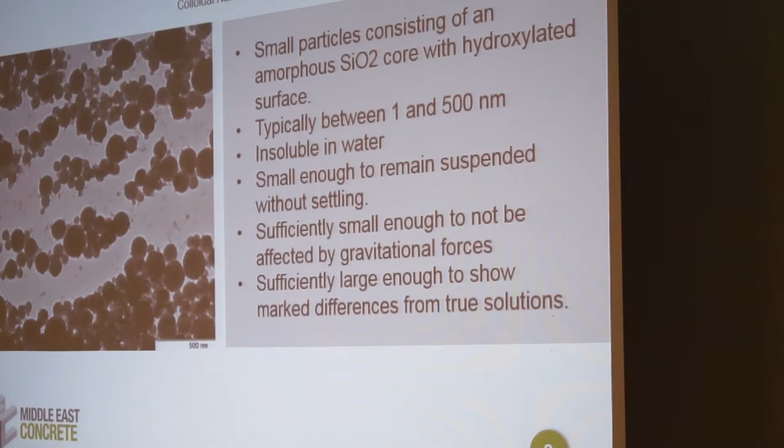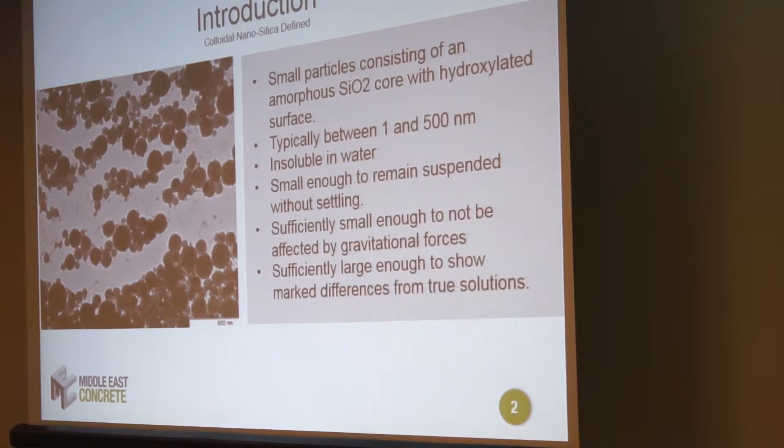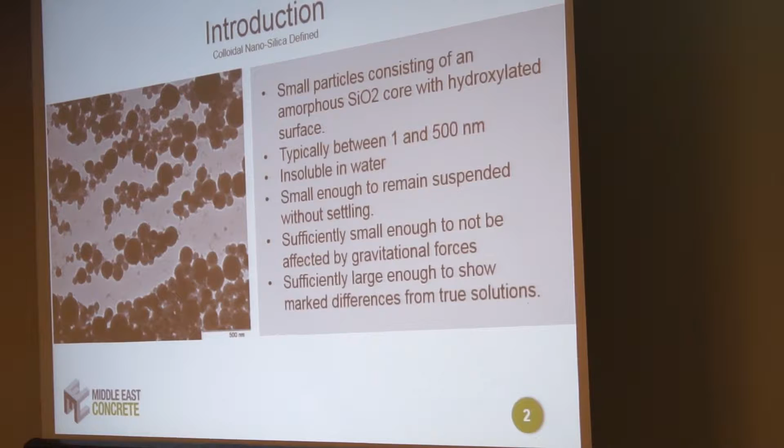Just as an introduction, colloidal nanosilica is very, very small particles of silicon dioxide. It's an amorphous silicon dioxide, typically somewhere between 1 and 500 nanometers. They're small enough that they can remain suspended in water, and the forces of gravity don't cause them to fall out of that suspension. So they're very, very small. But it's not a solution, not like a silicate solution, where the silicon dioxide is coupled with some metal ion. The colloidal silica particles can actually be seen under heavy magnification, and you can see that they're spherical in nature, but sufficiently large enough to show differences from true solutions.

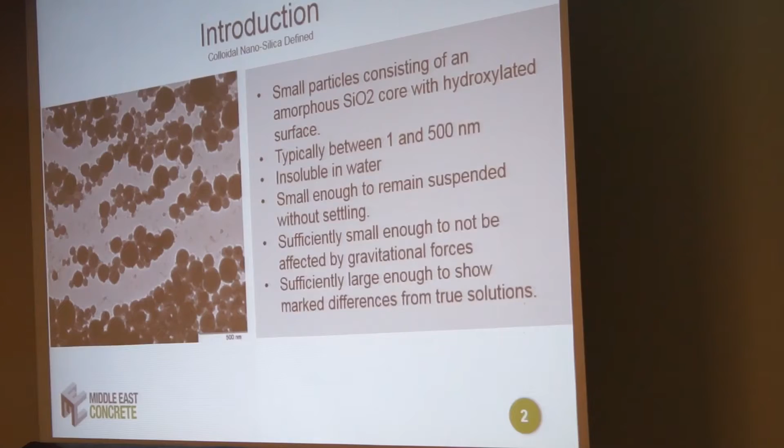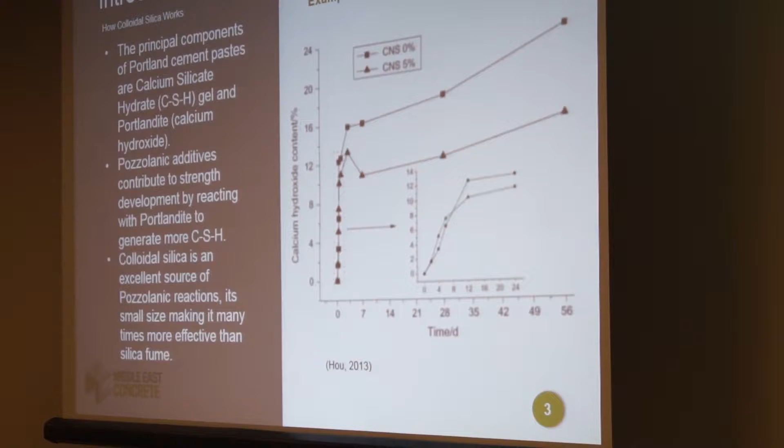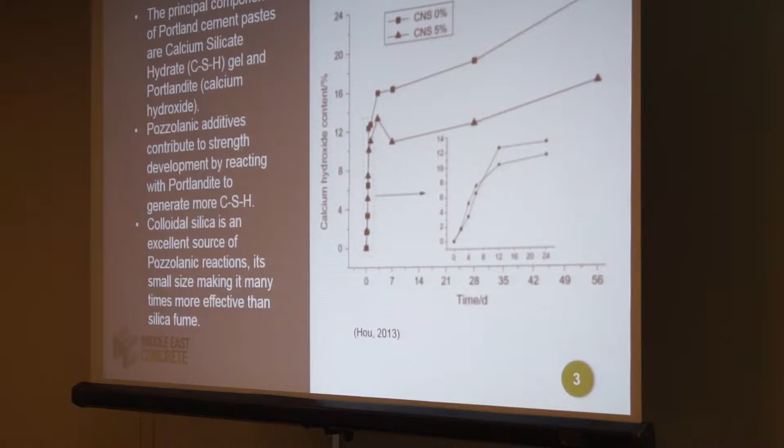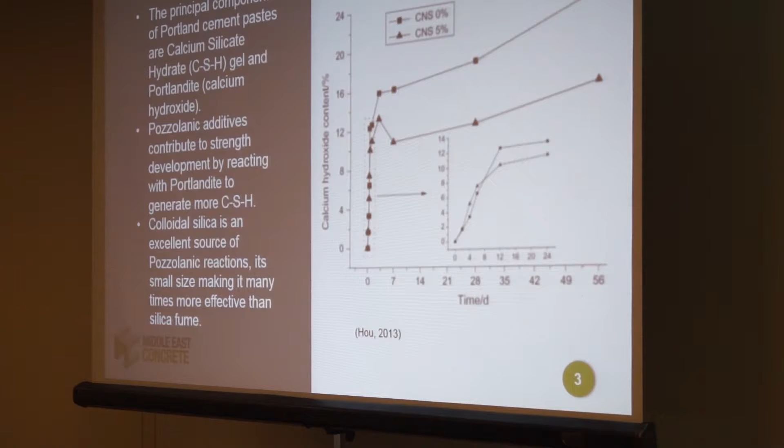The way they work in general, as a brief overview, is that they react in a way that is very similar to the traditional pozzolanic reaction, which many of you, if you've studied concrete, know what that is. It's where a silicon-bearing material reacts with existing calcium hydroxide to form more calcium silicate hydrate. Calcium silicate hydrate is one of the 2 main reaction products of the cement and water hydration reaction. So this secondary formation of calcium silicate hydrate can happen later. These pozzolanic additives make up things you've probably heard of, like fly ash, silica fume, ground granulated blast furnace slag, or GGBFS slag cements. Those things all have pozzolanic reactions very similar to what we're going to be talking about today, the colloidal nanosilica.

We see from the literature that colloidal silica is an excellent source of pozzolanic reactions, mainly because it doesn't differ chemically from the other pozzolans I mentioned, but its very small particle size makes it highly reactive, able to undergo serious reactions due to that small particle size, which means much more surface area.

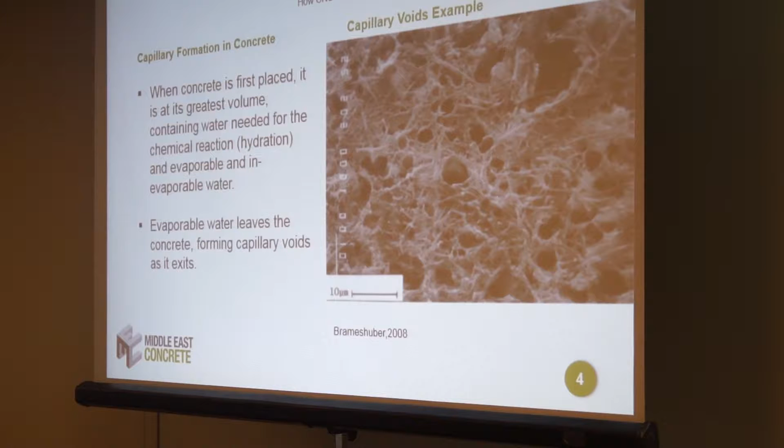We know that when concrete is first placed, it's at its greatest volume most of the time. So you have water of convenience above the water needed for the hydration reaction. That water leaves, the evaporable water leaves the concrete, forming capillary voids - like little rivers that form as the water evaporates from the concrete.

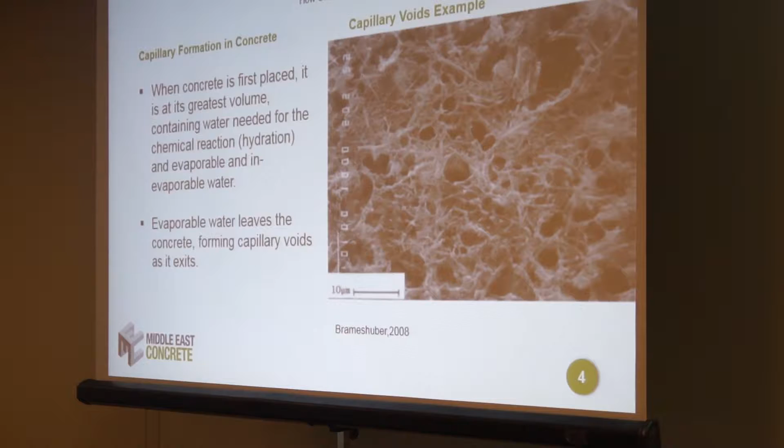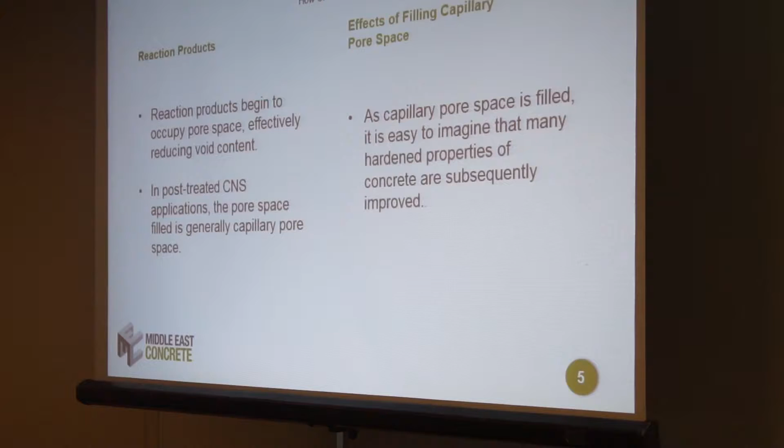The problem is that those capillary voids are not only the way water leaves, but they're also the way water and other contaminants can enter the concrete. We know that permeability to water has been linked to durability of concrete. It's the primary indicator of how long concrete is going to last, especially in reinforced concrete.

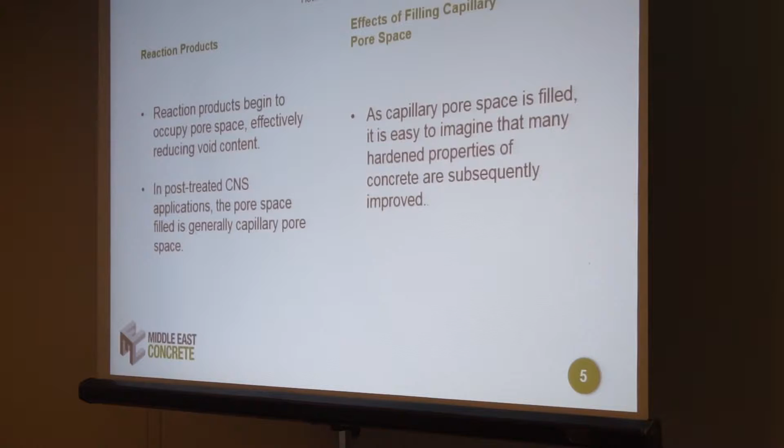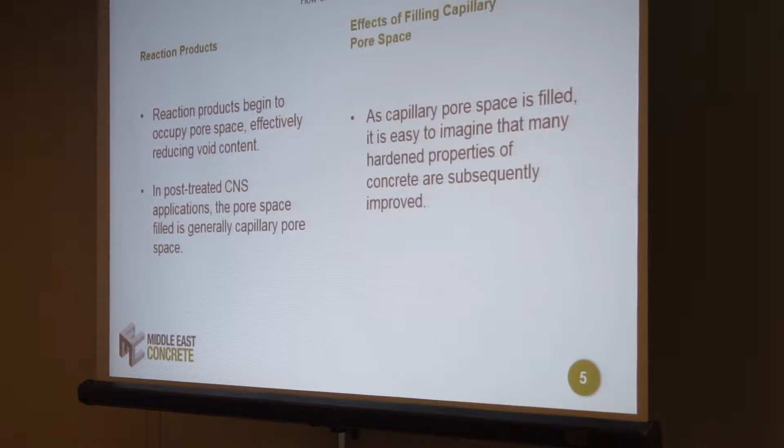When colloidal nanosilica is applied - I'm specifically speaking today about post-applied colloidal nanosilica. There's been a lot of research on integral colloidal nanosilica mixed with the concrete. What I'm talking about today is post-applied, meaning the concrete is mixed, sets, gains initial set, and then the colloidal nanosilica is added as a spray.

It can be added at various times in the life cycle - from just as initial set occurs, or many months or years later. Similar positive effects have been noticed from the colloidal nanosilica addition.

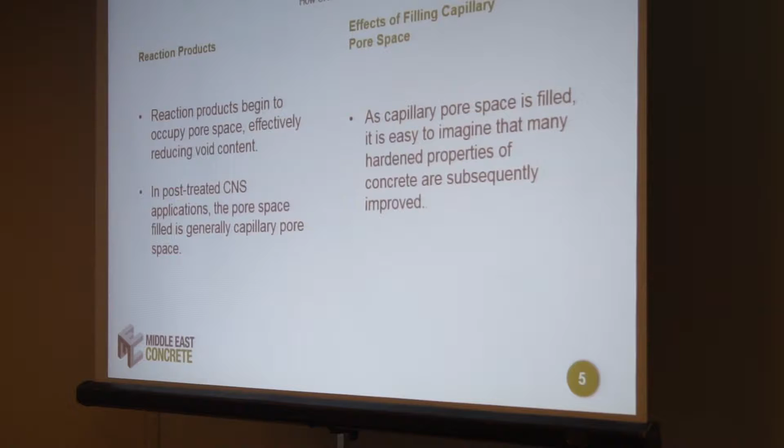I'm going to start referring to colloidal nanosilica as CNS, because it's a lot to say. In post-treated CNS applications, the pore space filled is generally the capillary pore space that comes when the water of convenience leaves the system. As that capillary void space is filled, it's easy to imagine that many of the hardened properties of concrete can be improved.

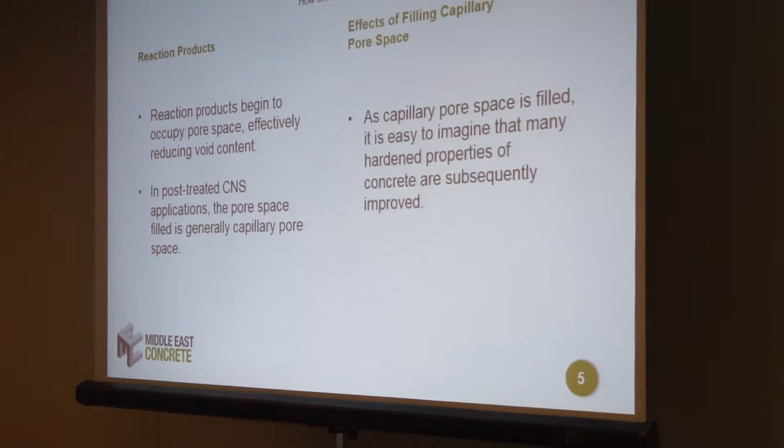The primary filling mechanism, from the literature review, is the pozzolanic reaction we were talking about - taking calcium hydroxide and reacting it to form more calcium silicate hydrate, which begins to fill that capillary void space. If you reduce the amount of void space in the concrete, there are a lot of hardened properties that are likely to improve.

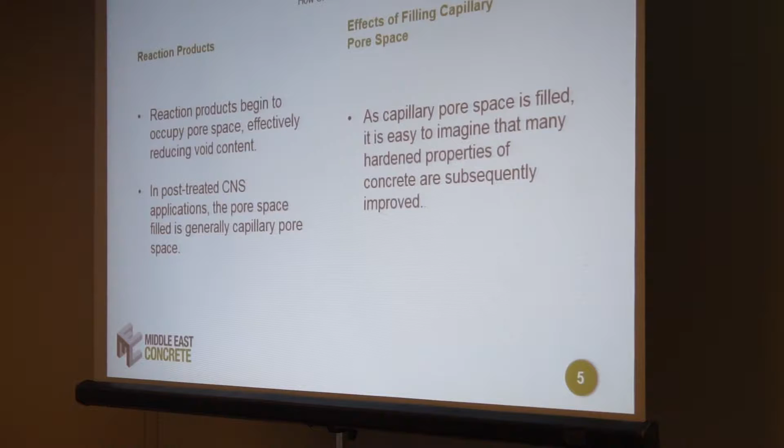We're going to take a look at those - the effects on compressive strength, drying shrinkage, and permeability. We're going to look at corrosion modeling based on reduced permeability, and a case study we did at the Port of Marseille, France, on a boat dock. The port wanted to try colloidal silica because they had tried many other things to increase the durability of their concrete, and they approached us to assist in this case study.

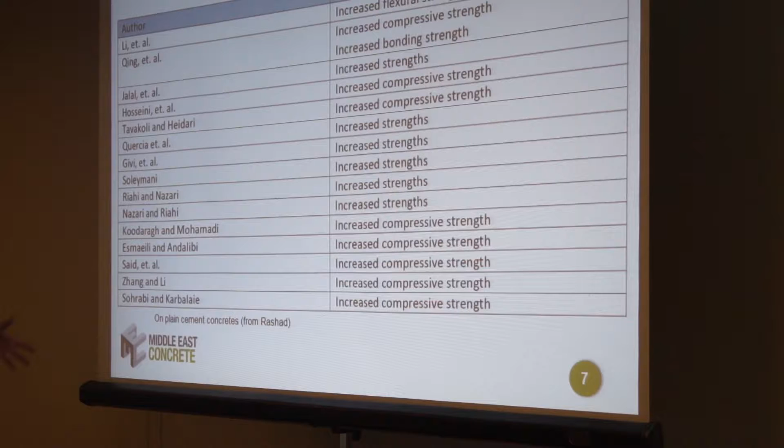I want to share some compressive strength effects - these are from previous researchers in the field, not me. Not all of these are post-applied; some are colloidal silica used as an integral admixture into the concrete, but the effects are the same. You can see a great lot of researchers have all demonstrated increased compressive strength.

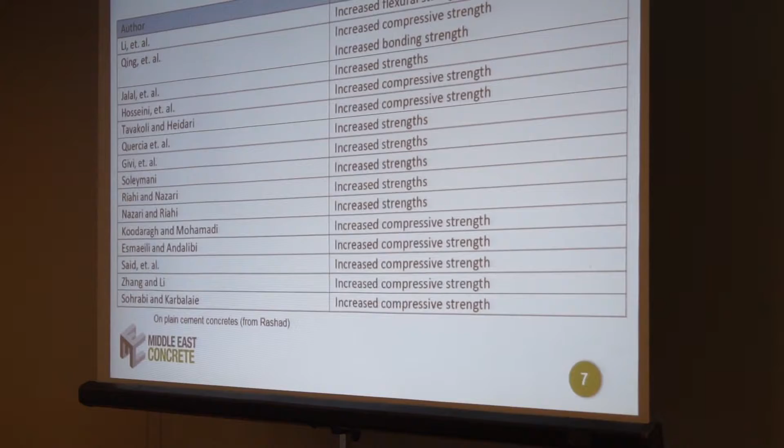There's some thrown in there - increased flexural strength, increased bonding strength, etc. This continues with researchers showing those strength improvements from using colloidal nanosilica.

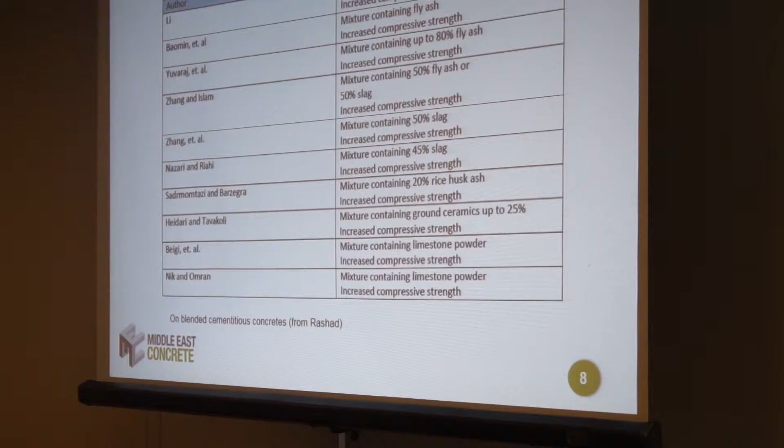So one key thing to understand about spray applied colloidal silica is that the effectiveness, or the amount of compressive strength gain you might get, is related to how permeable the concrete is to begin with. We know that concrete varies in permeability, and the primary driver of that is water to cement ratio, but other things can also affect it, such as aggregate gradation or particle size, aggregate shape. There are many factors—even the mix of cementitious materials such as cement and fly ash, and how those particles fit and pack together—that can affect permeability. But typically water to cement ratio is looked at as one of the primary indicators of where your permeability is going to be.

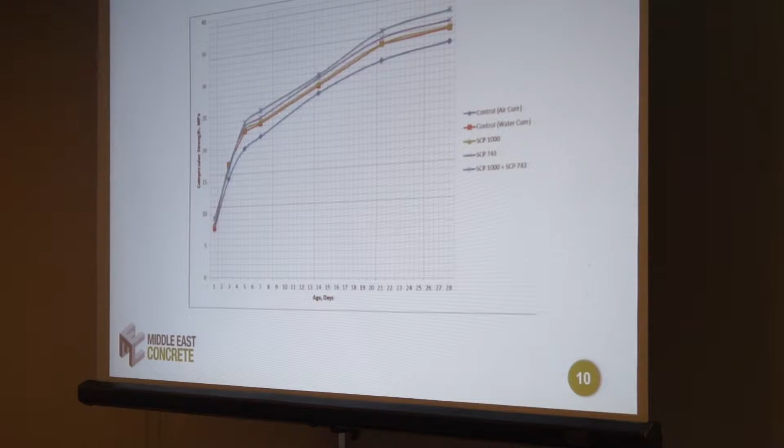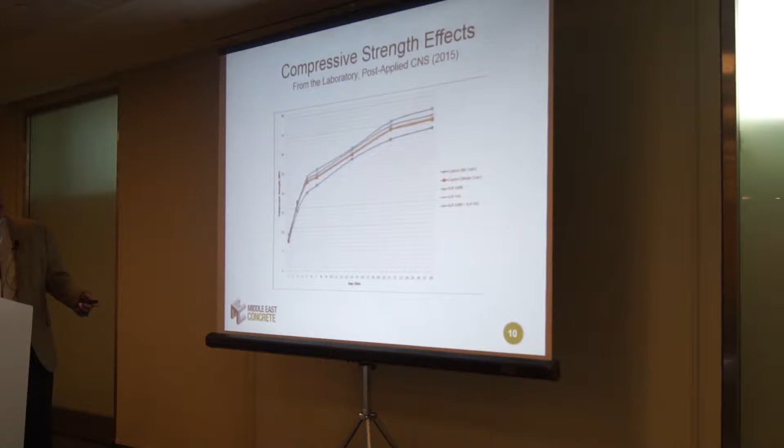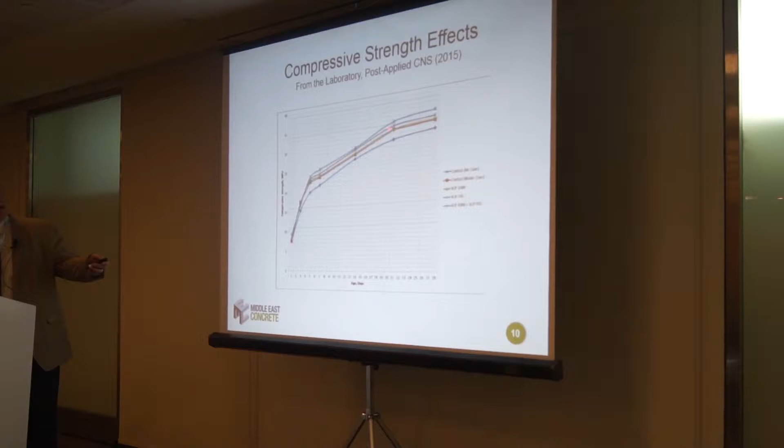Here we see, from 2015, the compressive strength effects from the laboratory, post-applied CNS. It's kind of hard to read, but you can see down here this is a curing study where we broke several samples at various ages. You can see we have the control here, and this is various applications of colloidal nanosilica.

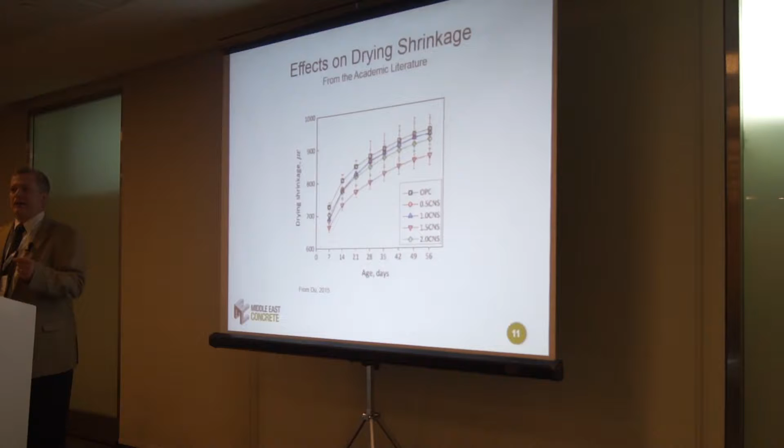I want to switch to effects on drying shrinkage, and you may be saying to yourself, wait a minute—okay, so it affects compressive strength, we get an increase in compressive strength, and now you're going to tell us it also does something with drying shrinkage? Well, yeah, because remember, the primary way, or really the only effect that the colloidal nanosilica is having, is that it's filling pore space. And filling pore space, a lot of good things happen when you close that pore space.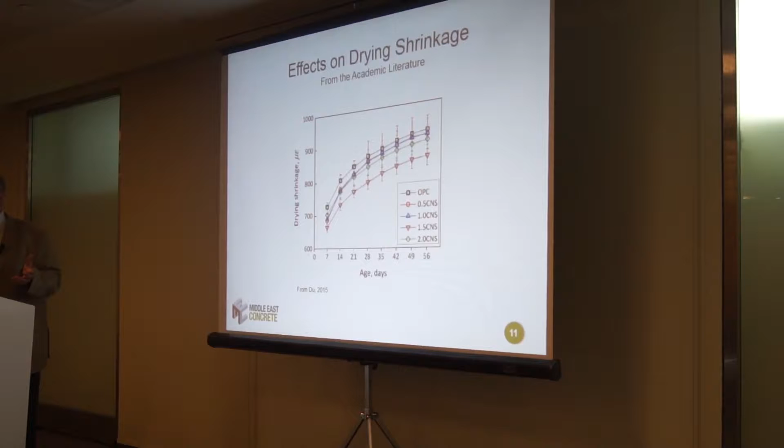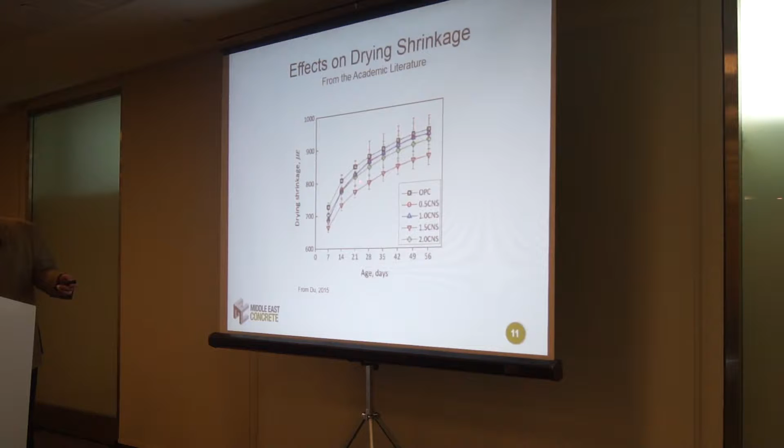So for drying shrinkage, we know from the academic literature that colloidal nanosilica reduces drying shrinkage by quite a bit. This is a graph from a researcher named Du in 2015. You can see he has various percentages of colloidal nanosilica. This was actually not a spray applied test—this was done as an integral admixture. You can see the control is here, ordinary Portland cement at the top, and the drying shrinkage in microstrain decreasing. It looks like the optimum percentage he found was around 1.5% colloidal nanosilica.

Effects on drying shrinkage from my laboratory and others show a range. 2012 to 2013 is when we did this testing, from 46% to 61% or so improvement. This is the post-applied colloidal nanosilica, and again this is not just UTC laboratory—there were a few of these studies done at Middle Tennessee State concurrently. You can see the drying shrinkage—this was a really high water to cement ratio for the control, and there was an improvement there, but it was a very high water cement ratio mix.

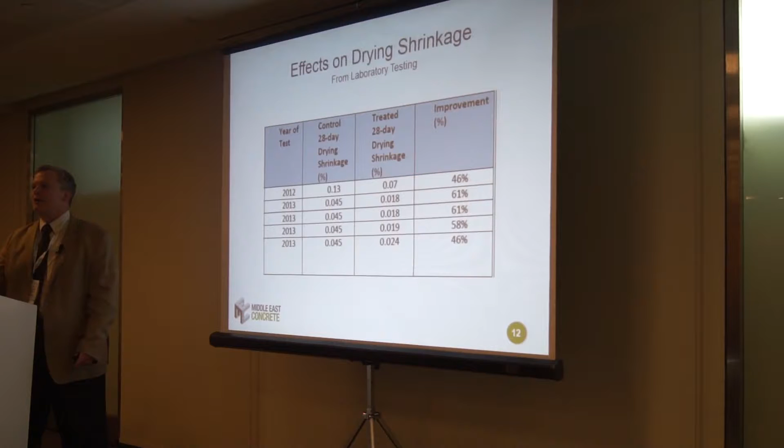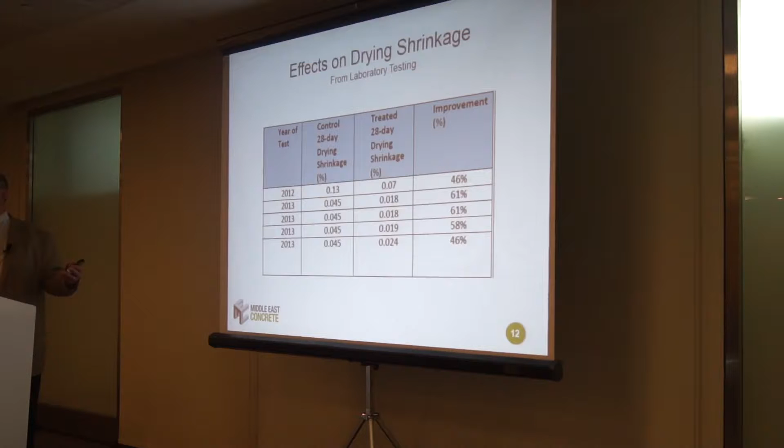So the improvement to drying shrinkage, again, is based on the permeability of the concrete itself. The more permeable the concrete is, the better improvement you're going to have, to a point. I'm sure there's concrete that is too permeable to respond well, but I haven't found it yet. So again, that's the reason for the range.

Effects on permeability from the academic literature. Again, we call this—if something seems to, or is claimed to, solve many, many problems, or fix all your problems—in the States we oftentimes call it snake oil. That comes from the old Wild West days, when they were settling out in Arizona and New Mexico. There would be settlers going around selling these bottles of magic potions that would cure anything wrong with you. As a researcher, that's one of the first things I thought when I first heard about this. I'm going, what? A snake oil salesman coming in here telling me it's going to do all this with concrete.

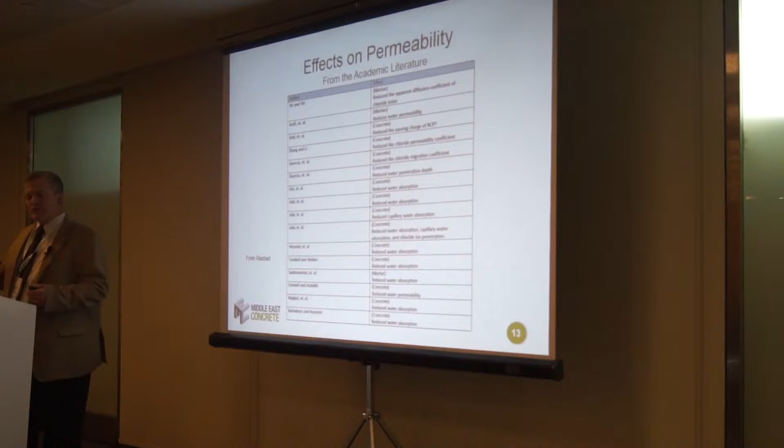But again, remember, it's filling the capillary voids, so it's reducing void structure, making the concrete more dense, and it has a lot of really good effects. So when we close those capillary voids with colloidal nanosilica, it closes off that route of ingress from water and other contaminants that can get into the concrete.

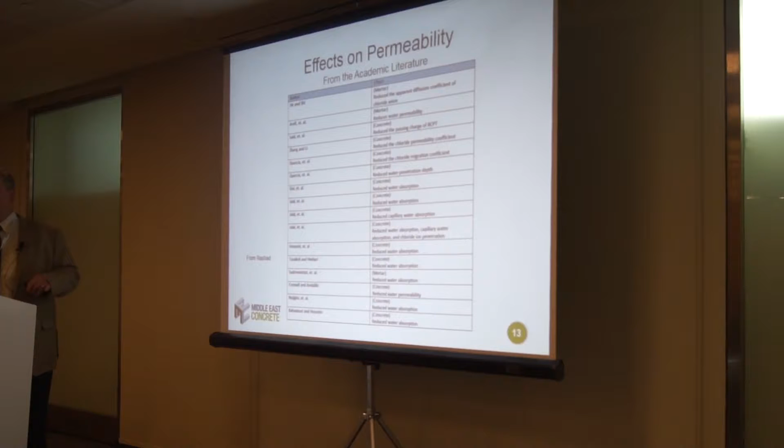Logically, it follows that maybe freeze-thaw durability is also improved. There are a lot of other things that research has shown. We're only focusing on compressive strength, shrinkage, and permeability today, but there are many others we could talk about. These are, again, a list of researchers - not all of these. There are some that were spray applied, some were integral colloidal nanosilica, I mentioned.

These photographs are some of the best demonstrations of the closing of capillary voids that I could find. You can see, hopefully, number 4 here is pore space, and you can see how much it shrunk after a colloidal nanosilica treatment. Number 1, the area beside it, is CSH. The area beside number 1 is a giant hole, and it's basically closed here. In this photograph here, you can see a giant pore space here, and it's gone. You can see the pore space here is not completely gone, but it is shrunk. This pore space is gone.

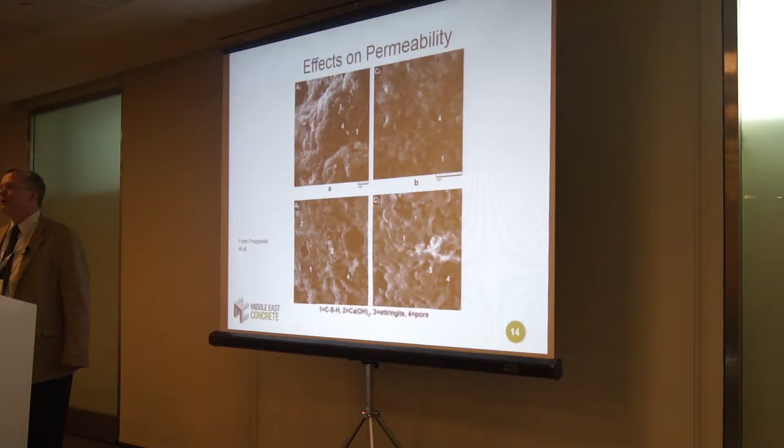So you can see that filling of capillary voids is something you can see under a scanning electron microscope - the filling of capillary voids from colloidal nanosilica. Now, does it have an appearance that will jump right out at you and say, hey, that's caused from colloidal nanosilica? No, it doesn't.

Because the colloidal nanosilica's reaction product is the same as what normally happens in concrete. As concrete gets hard, the water and the cement react, and calcium silicate hydrate is formed. Well, the calcium silicate hydrate is the reaction product between the calcium hydroxide and the colloidal nanosilica. So when we look at it under a microscope, the key indicator is that the pore space is greatly reduced, rather than something jumping out and saying, hey, I'm caused by this colloidal nanosilica.

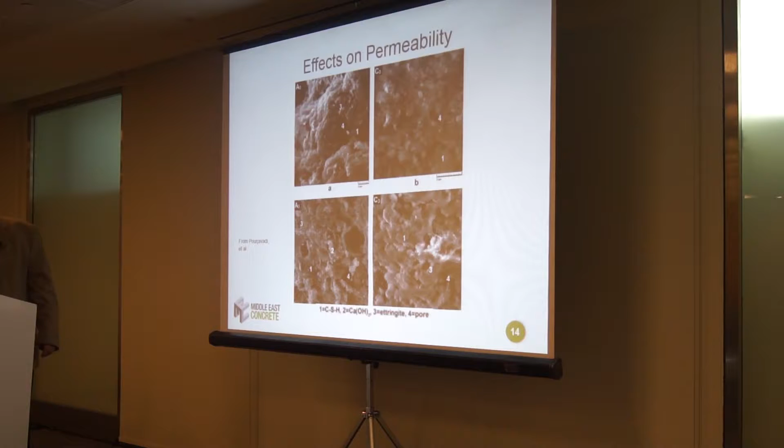So you can see that there's quite a bit of improvement. Some of them were tremendous improvements, and then some of them were less. It greatly depends on the concrete, the parent concrete - how permeable is that concrete, how reactive is that concrete.

So my suggestion is that what the research has shown is it's going to improve permeability characteristics. It's going to improve compressive strength characteristics. It's going to decrease shrinkage. But to what degree - it's going to do it to a certain minimum amount, but to what degree is dependent upon the raw materials. Like so many questions with concrete, when we talk about concrete technology, one of the first things I tell my students at the school...

Just because a concrete mix design works in Chattanooga, Tennessee, doesn't mean it's going to work in Atlanta, Georgia, or doesn't mean it's going to work in Dubai, UAE, because the raw materials are fundamentally different. And that's why folks like me have a job, because there are so many variables that it's very difficult to track all of them. The best we can do is to try to have predictive models that will tell us how the concrete is likely to behave.

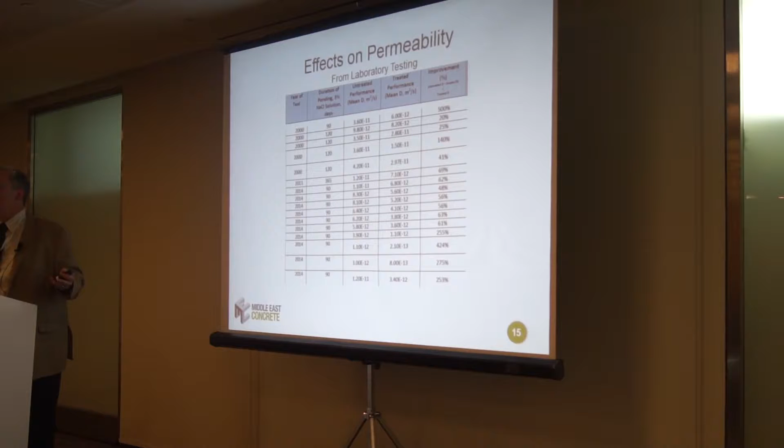So when we have colloidal nanosilica being applied to concrete, my suggestion is, if there are general contractors or engineers in the room, to try it on concrete made with raw materials that are going to be used on the project, and do the testing to see what the effects will be with that particular raw material combination.

This is just a continuation of the previous slide. You can see more improvements on permeability. Since this was done, I've since begun running some permeability testing using a new test standard called - or it's new to me, it's not that new - NT492, NordTest 492. Does anybody have any experience with NT492 in the room? All right, NT492 is a very fast electrostatic way to pull chlorides into the concrete.

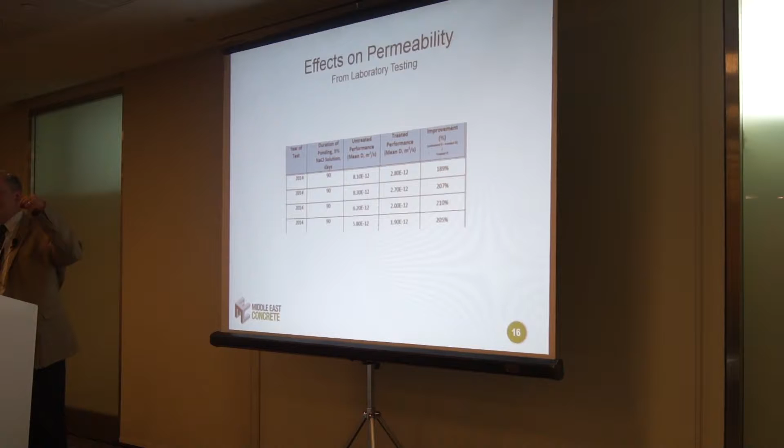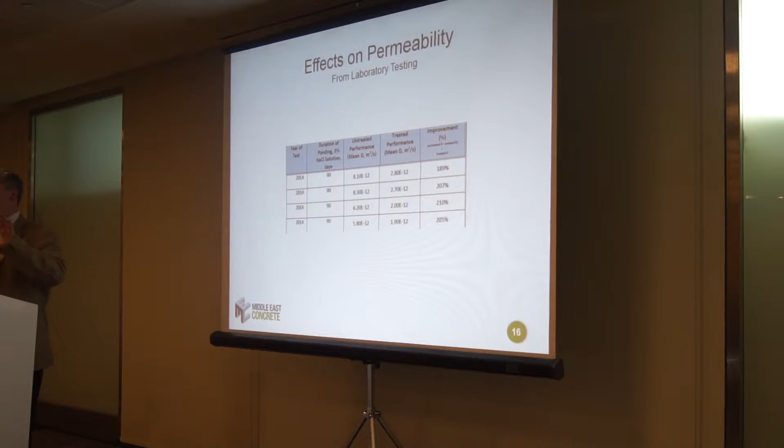So you have calcium hydroxide on one side, sodium hydroxide on one side, sodium chloride salt water on the other side. You induce a voltage, and then you can pull chlorides into the concrete and then measure the chlorides and how quickly. So it makes a comparison between untreated concrete and treated concrete with colloidal nanosilica. It makes it very fast and very easy to determine how well the concrete's going to improve.

Here's a slide from a DIN 1048 test. I did say that we ran a lot of ponding tests on permeability, but we also ran some DIN 1048 testing, which is a European standard.

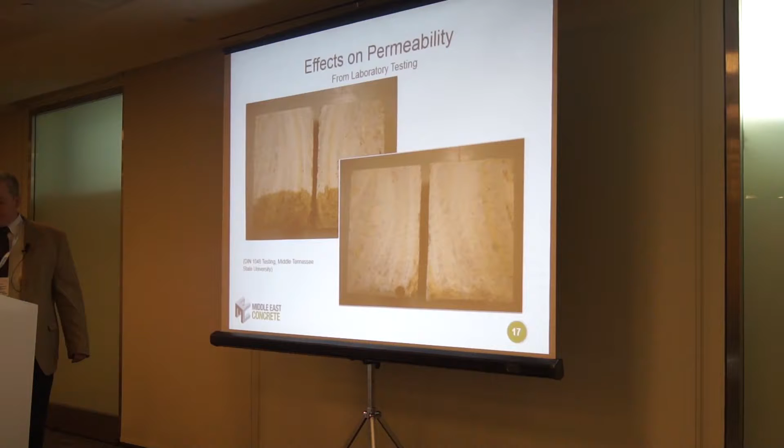This sample was a particularly bad concrete with a water cement ratio of around 0.60. This is a US penny for scale. This test was stopped after only 20 minutes because the water was going through the concrete sample so quickly that they shut the test down.

This was run for 72 hours, same concrete, the only difference being that this was treated with spray applied colloidal nanosilica. At 72 hours, there was only about 5 millimeters penetration into the concrete. That's a pretty significant change in how that concrete was behaving.

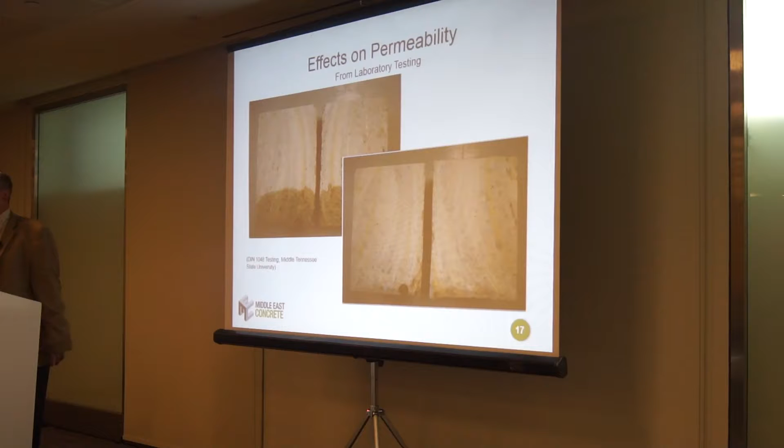This testing was done under hydrostatic pressure. The DIN 1048 test can be set at different pressures, but I believe we ran it at 7 bar, just to give you an idea of how the concrete will behave under hydrostatic pressure. You can see the improvements have been significant.

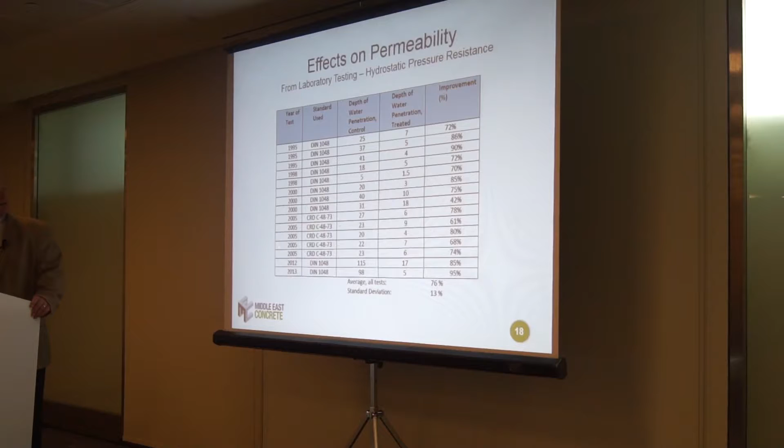Of course I did not run these tests myself, this was done in previous laboratories. You can see up to here, that's DIN 1048. This next section is the US Army Corps of Engineers hydrostatic test. So all of these are DIN 1048 except for these.

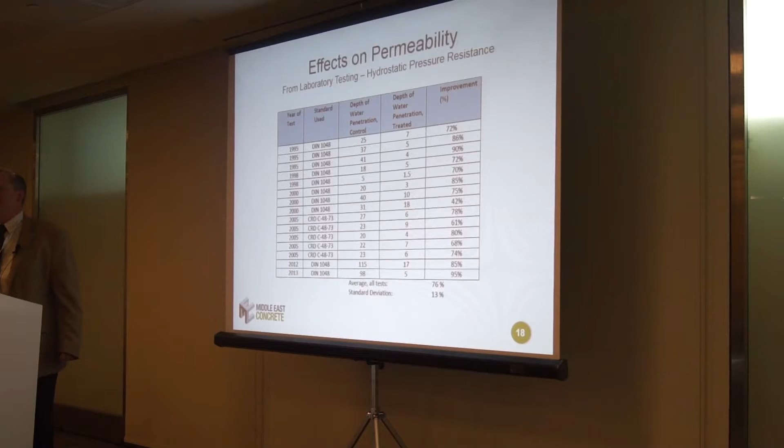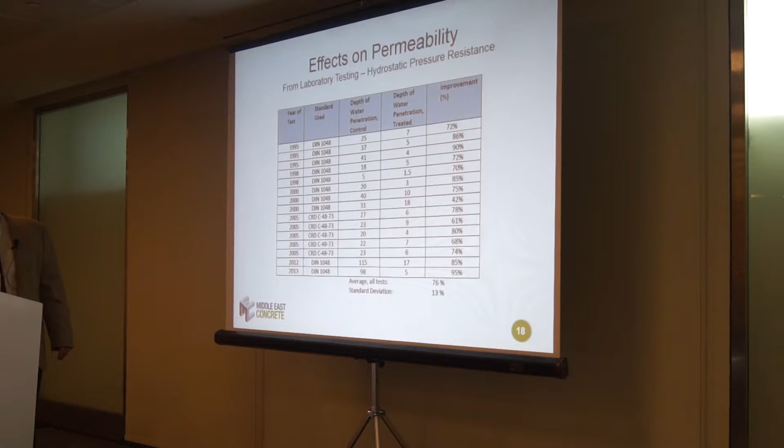The only difference between the tests is that these use pneumatic air to apply water pressure, so you have water and air pressure behind it. This other test, the Army Corps of Engineers requires a 100-foot column and dropping water into the concrete, so we're simulating the water column here, and this is actually using the water column. The average of all these tests is a 76% improvement in hydrostatic pressure resistance, with a standard deviation of about 13%.

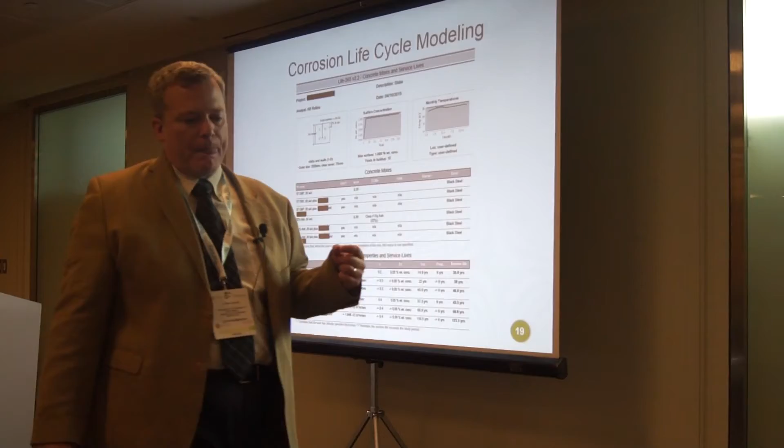So what does all this mean? If the colloidal nanosilica improves permeability of the concrete to this degree, how does it relate to how long the concrete is going to last? Some of you may have heard of Life 365.

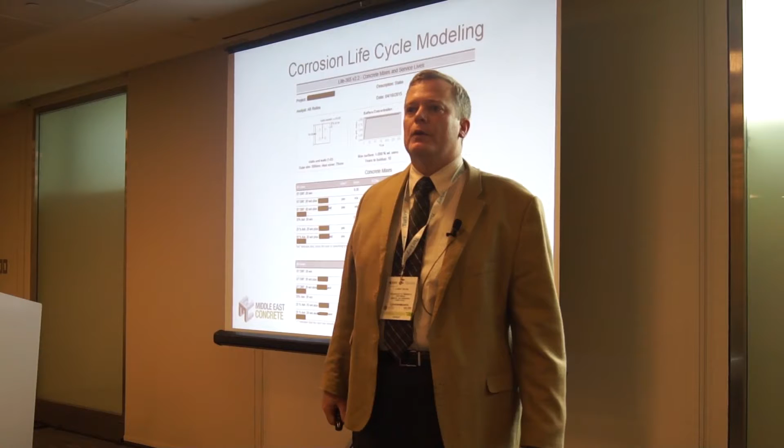Life 365 was a corrosion modeling software project undertaken several years ago by the American Concrete Institute, or ACI, Committee 365. They did it in combination with NIST, the National Institute of Standards and Technology, along with ASTM, the American Society for Testing and Materials.

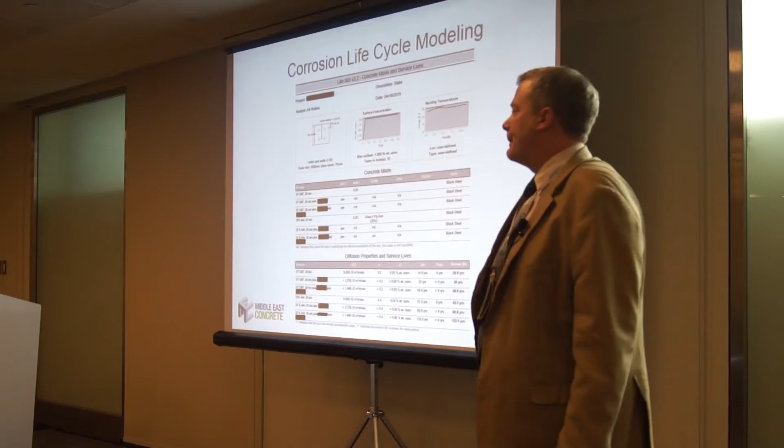They put a lot of work into developing a conservative life expectancy model to try to get an indication of how long reinforced concrete would last under chloride loading at various concentrations and permeabilities. The general idea is that as the permeability of the concrete changes, chlorides will reach the rebar, or reinforcing steel, based on the diffusion coefficient at different times.

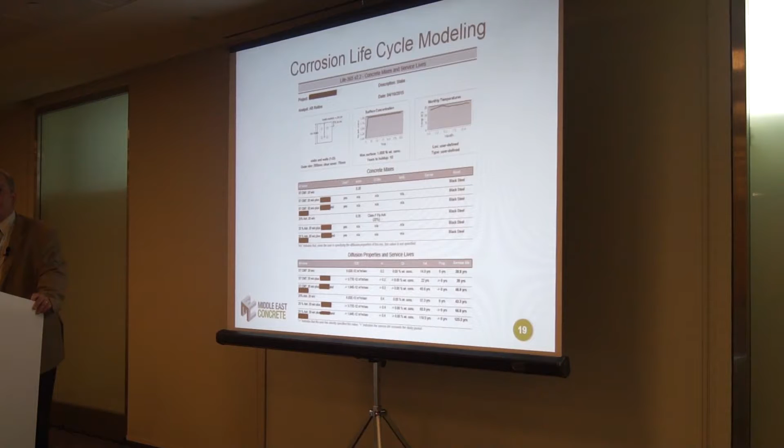If the chlorides reach the reinforcing steel earlier, then chloride corrosion begins earlier, and the life cycle of the concrete is reduced with higher permeability. As the chloride diffusion coefficient is smaller, it takes longer for chlorides to reach the reinforcing steel, and the concrete will last longer. So we've begun using Life 365 to estimate gains in service life of concrete treated with colloidal nanosilica.

It's kind of hard to see, and I apologize for that, but the next page will give you an idea. I'll go through a few of the model ideas. You set your rebar depth, reinforcing steel depth, the amount of cover, and the depth of the entire concrete placement. This is done in one dimension here, but you can set it up in 2 or 3 dimensions.

You set your surface concentration, but there are defaults in the system. So if you want to model a parking deck in New York City, it makes some assumptions that de-icing salts are coming in on the car wheels and those kinds of things. So there are defaults you can use if you choose, or you can set it up with your own constraints.

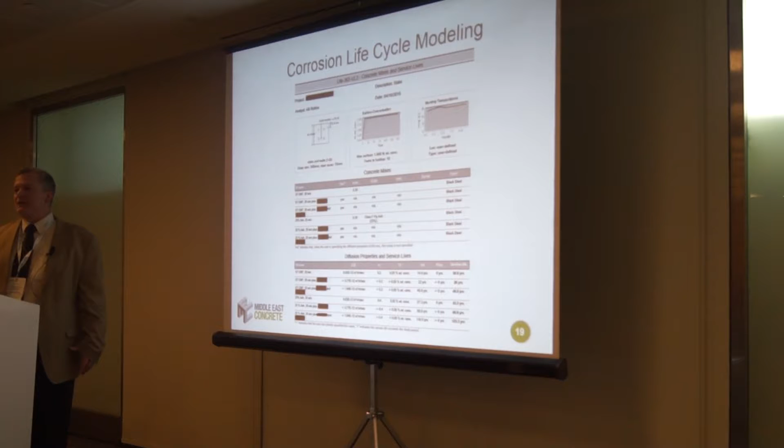Monthly temperatures are also fed into the model. This is a probabilistic model, meaning that statistically, thousands and thousands of cases have been fed into this model to train it to predict when corrosion is most likely to begin to occur.

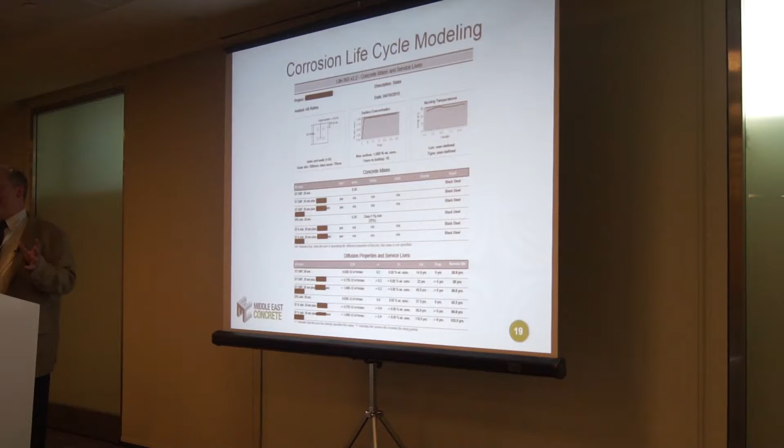I'd invite you to take a look at Life 365 and read the background on how they developed the model and how it performs and what it means. I'm not an expert on how it does it, I've just learned to use the model to help estimate how long concrete will last.

So we can see on this particular model, we used a 0.35 plain Portland cement mix, no supplementary cementitious material - that was our base mix. So 100% cement, no supplementary cementitious material. The model predicted that the service life of that concrete was 20 years.

20-year concrete - I don't know too many engineers or owners that would be happy with concrete that was only expected to last 20 years.

So the next thing that we did is we took a spray-applied colloidal nanosilica to this 100% cement concrete with no pozzolans, and we were able to extend the lifespan up to close to 30 years. So we gained 10 years, or roughly a third, by applying colloidal nanosilica.

We used the chloride diffusion coefficients that I showed you earlier from the ponding test that we had run. We took an average from those, and we were able to reduce our permeability, which extended the lifespan.

So then we looked at 100% cement plus a spray-applied colloidal nanosilica and an integral admixture colloidal nanosilica. We've been testing integral admixture colloidal nanosilica along with the spray-applied the whole time, and we can see that the two complement each other very, very nicely.

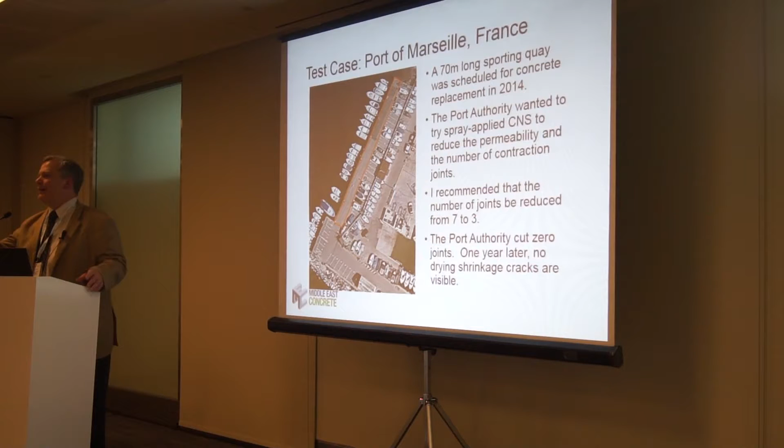So we had a case study in Port of Marseille, France. They had a test case they wanted to try, a 70-meter long sporting quay - or quay, I think my Australian friends will make fun of how I say it. We say quay in the US, I don't know what you guys say, but it's a boat dock.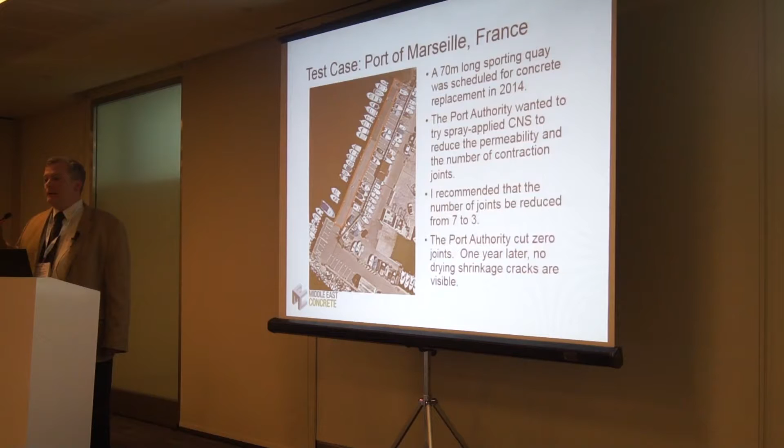The Port Authority wanted to try spray applied CNS to reduce the permeability and attempt to reduce the number of contraction joints. They had seen the research showing it could reduce shrinkage, so from a stress analysis I recommended that they reduce the number of joints from 7 to 3.

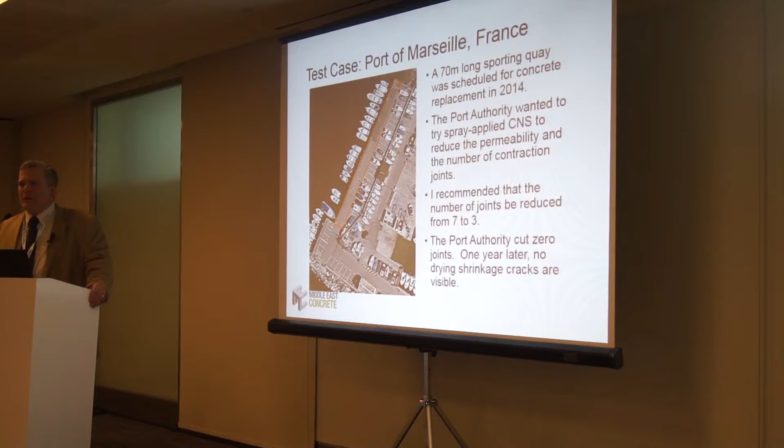The Port Authority called me a couple of weeks after they placed it, and they said, Brent, we placed your concrete. I said, okay, how did it go? And they said, well, it went great, we don't have any cracks. I said, well, how many joints did you cut? And he said, we didn't cut any. I said, you got to be kidding me. Yeah, then you got lucky.

Spray applied colloidal nanosilica is not the golden prize for crack-free concrete, but it will greatly reduce the chances of drying shrinkage cracking occurring.

You can move joints out further. How far, you might ask? Well, again, it's going to depend on the specifics for the project. It's going to depend on how permeable the concrete is, what the aggregate package is. There are so many variables, but it is something I can kind of have an idea of, just from a mix design analysis and an idea of how the substrate of the concrete is going to react with the concrete itself, and those kinds of things.

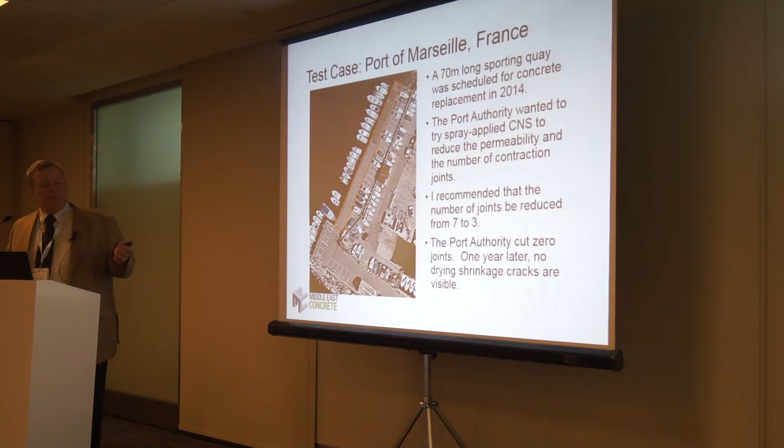So I did get lucky. It made me look like a hero to the Port Authority, but it was more luck than anything. I asked them to cut 3 joints and they did 0.

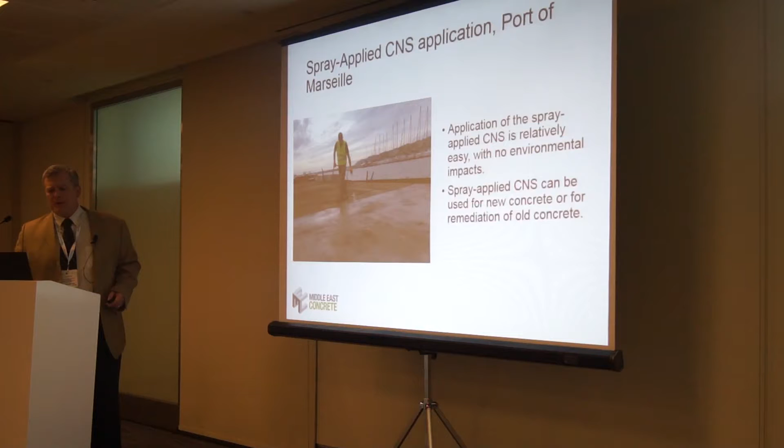So the application of the spray applied... excuse me. The application is relatively easy. The particular product we were working with was a 0 VOC product, so there was no danger to the environment or anything like that.

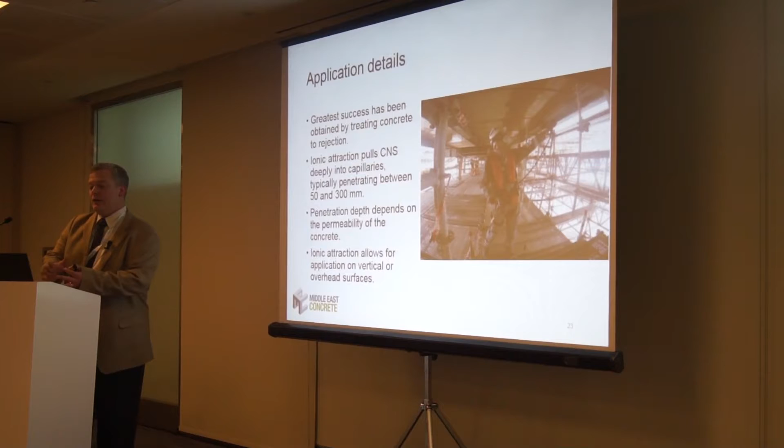Basically the way they apply it, and the greatest success they've had, is to apply to rejection. They spray the colloidal nanosilica and wait a few minutes to see if it disappears. If it disappears, it's being absorbed into the concrete, and they apply again immediately. There's a 15-minute window, so they repeat 2-3 applications during this window until it ponds on the surface. After that, they know they have maximum penetration of the colloidal nanosilica into the concrete, and that seems to be when it works well.

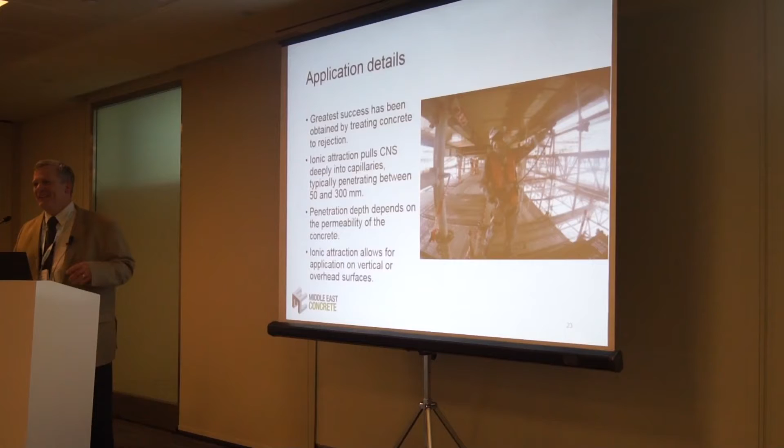When I first heard about the product, one of the first tests I did was I took a pan in my laboratory and put some of this colloidal nanosilica liquid in the bottom. I took an old concrete cylinder that had been sitting in the lab for a year or so, and put it in the pan, in the liquid. I went back to my office, did some work, and came back into the laboratory an hour or so later, and saw that the material had actually been wicked up into the concrete vertically. It pulled the product into the concrete vertically.

That's when I told myself, hey, this is different, this could potentially be an innovation. Let's see what we have here. And sure enough, it can actually be applied on vertical surfaces, walls, as well as ceilings. There's an ionic attraction going on, that's the way it's been explained to me. I'm not a chemist, but it's chemically attracting the product into the capillary void system. I've actually seen with my own eyes it displace materials that are in the capillary voids.

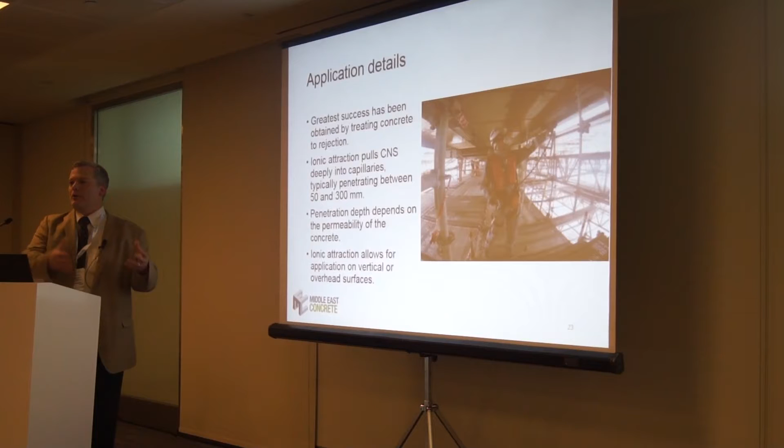We did a project, not detailed here, where we took some salt and introduced sodium chloride into concrete on purpose, 5% by volume. We treated it with colloidal nanosilica just to see what would happen. We were running half cell potentials on some rebar I had embedded in the beams. I came back the next day and had a concrete beam with white fuzz on it, about 6, 7, 8 millimeters thick.

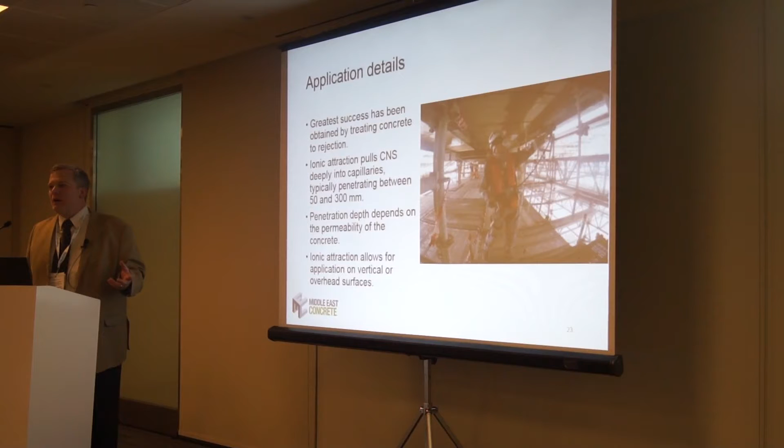You could write your name in it with your finger. I called the guy sponsoring the research over and said, you got to come look at this. He came over and said, well Brent, what is it? I said, it's salt, we mixed salt into this concrete, and it's just purging the salt out of it. He said, there's no way. I said, yeah, it is. He said, well how do you know? So I tasted it and said, that's salt. Probably shouldn't have done that, but I've been around concrete my whole life, and I knew there wasn't anything that was really going to hurt me.

We've actually seen it displace things in the capillary void structure. It's preferred because of that ionic attraction, so it gets pulled into those capillary voids. The reaction begins to happen, and it's making calcium silicate hydrate. As it makes that calcium silicate hydrate, it's pushing anything else that's in that void system out.

I've seen on job sites that the company sponsoring the research called me up. I've seen red wine purged from a pool deck. I've seen some interesting things happen.

So the penetration depth depends on the permeability of the concrete as well. We talked about so many things depending on substrate permeability. But we've seen in the laboratory, as well as cores taken from the field, typically somewhere between 50 and 300 millimeters is how deeply the product will go. It depends on the water/cement ratio — again, permeability has so many variables. In some cases, shotcrete applications, we have seen as much as 250 to 300 millimeters, but that's mostly for very permeable shotcrete applications at the higher level. 50 to 150 millimeters is normal — we'll see that range of penetration on many of the samples.

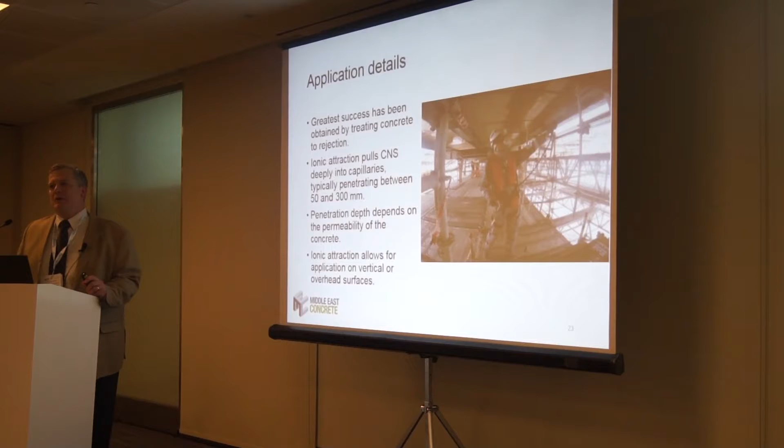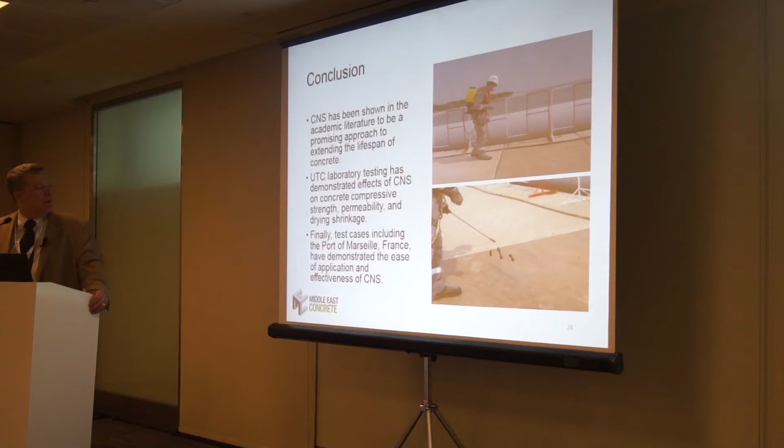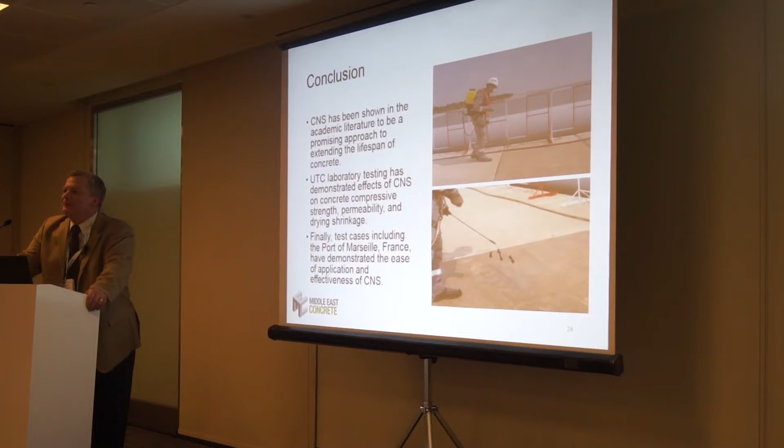So in conclusion, I think we've shown that the academic literature, the academic researchers out there, are understanding that colloidal nanosilica may be something special that can help us with concrete durability. Our testing at the laboratory at UTC has confirmed a lot of that previous work, but we've also seen some things the other researchers hadn't seen yet. Finally, the test cases — including the Port of Marseille, as well as others — have demonstrated that it's an easy product to apply and that it's effective. When we saw zero cracks on the Port of Marseille boat dock, we got lucky, but at the same time, if it hadn't been there, I'm confident there would have been some random cracking occurring.

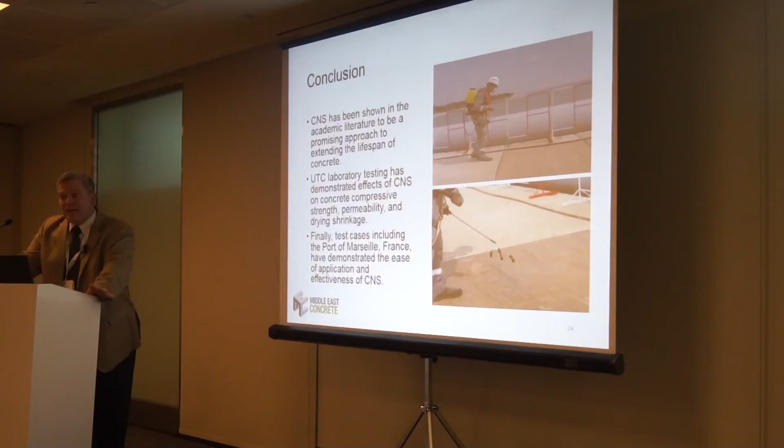So that wraps up the presentation. Four minutes at least, yes.

On the application — you said you would do 2 or 3 coatings until it gets saturated, basically. What's the effect of temperature? Let's say you're in Dubai or a very hot area and your substrate is very hot — are you going to waste product by applying it in the daytime?

That's a good question. I haven't been involved in any case studies in hot areas, but from what some people have told me, oftentimes they'll flood it with water first to cool the concrete and then apply the product, because the water doesn't keep the product out of the concrete — the water will evaporate and the product will stay inside. So it's preferable to wet it first. That's what I've been told, though I haven't verified that in the laboratory.

Regarding this presentation on colloidal nanosilica — the very common admixture used now is microsilica itself. Did you carry out any comparison between the two for performance? I didn't carry out that comparison myself, but it has been significantly addressed in the academic literature, where others have done that. The idea is that colloidal nanosilica is much finer than microsilica or silica fume — the particle size is much, much finer, and therefore, to sum up the academic literature, much more reactive than the silica fume itself. So the consensus is that it's much more reactive.

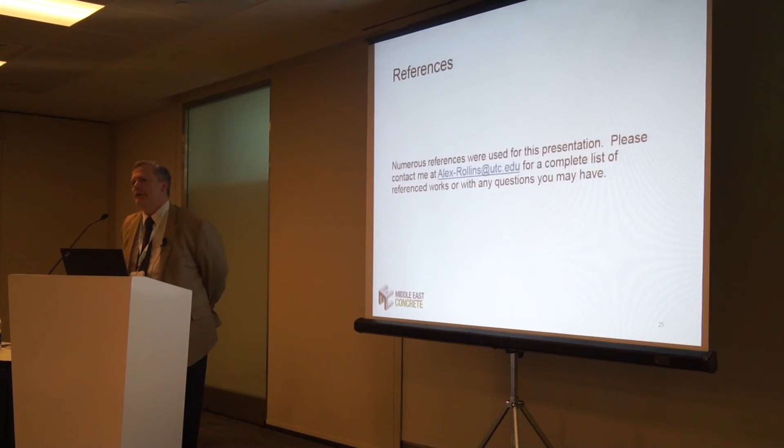You mentioned when you bonded the element within the solution, there was an induced chloride in it, and the chloride came out on the surface. Yes - my background is treating leaks and chloride contamination, modeling the structure, because the owner wants the building to last 100 years, and now it's been reduced because of a leak and chloride reduction. My second question: if I apply the product to the surface, am I going to get leaching of salts to the surface, and will the paint blister? Well, if you apply the product properly, the paint would have to be removed first. No, say paint is removed and I've applied it - am I going to see chloride leaching to the surface? Typically what I've seen in the laboratory is that leaching, or the expulsion of contaminants, occurs immediately within the first 24 hours, and then you wash it off and it doesn't do it anymore most of the time. Before putting subsequent finishes on top, you'd want to wait to make sure the purging action of the colloidal nanosilica was over with before putting another coating or paint on the surface.